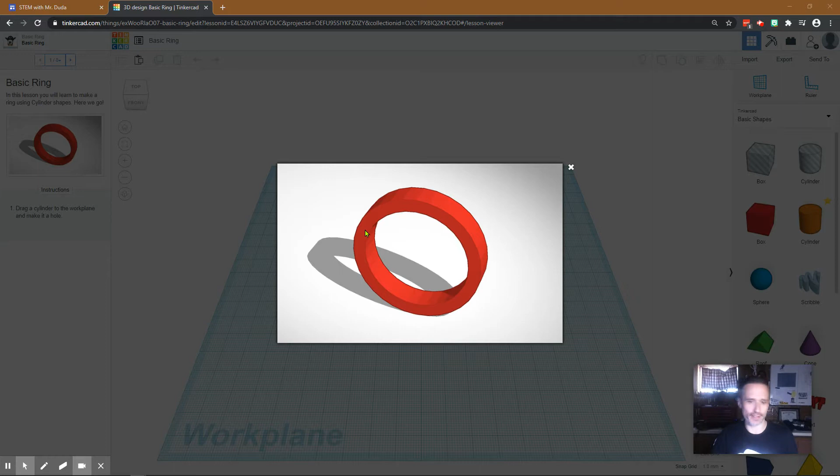So the way we start, we log into TinkerCAD. You can log in with Google. It's just tinkercad.com. You may have a dashboard with a bunch of stuff you've made, or you may not—it really depends on if you've created anything.

You'll click Learn, and make sure this is on 3D. If you haven't done my starter lesson, please check out the videos and follow along. Click on Lessons—I have videos on all of these. We'll need to click See All Lessons. I also have some videos on Die from Scratch, Saw-Shaped Wrench, Simple Heart Ring, and maybe some more by the time you've seen this.

We're going to click on Basic Ring. Restart the project for me, that way we're starting from scratch, making it nice and easy. Then just click on the name here. Start.

Make sure you're using a mouse. A mouse is definitely the best way to do this—it's very hard to use just with a keyboard.

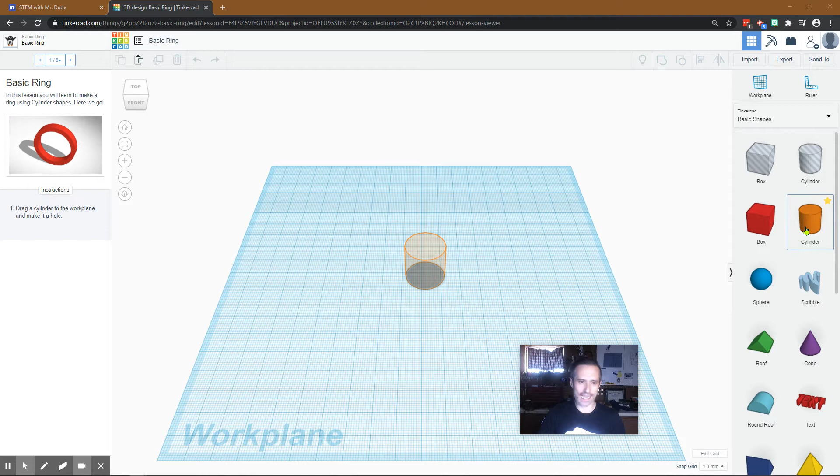So they want us to drag a cylinder to the work plane and make it a hole. Now it's funny, because I'll tell you right now, we could just drag the tube in and make this ring very quickly, but I like that they're teaching you the skills. So let's drag a cylinder in, and they want us to make it a hole. The way we do that is when we let go, we say hole. Now, you could have just dragged the whole cylinder in—it's up to you.

That was favorited. There's a section in here where you can actually choose your favorites, and the shapes are there. Apparently, I really love cylinders.

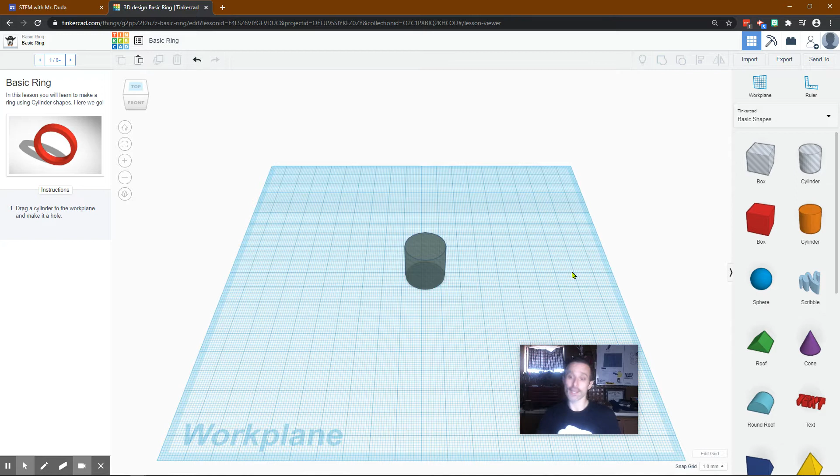So then we click Next. The cylinder should be scaled to fit the finger it is made for. So you can measure your finger, measure the biggest knuckle on that finger so you make sure it fits. We will use 17 millimeters for the diameter in this example, but feel free to adjust the size to your needs. So they're actually telling us to change the size, but they don't explain how.

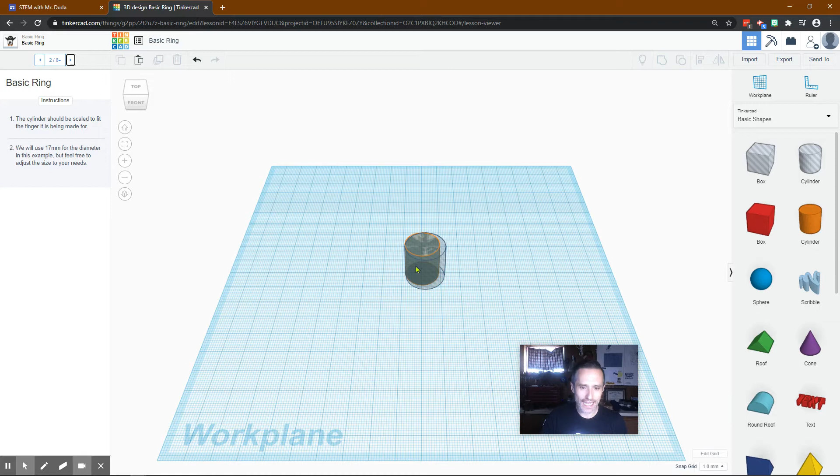The way that we would do that—I think they want us to just scale this down. So the best way, we would click here on the corner, and then we just type 17, press Tab, 17, so we have 17 by 17, press Enter. It should be the right size.

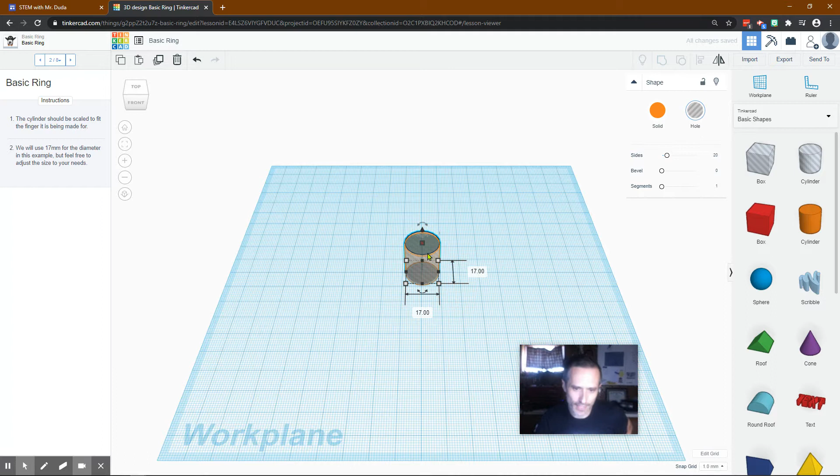Sometimes it doesn't align perfectly. Dragging it farther away and then bringing it back sometimes makes it easier to line up. That looks pretty good to me. I right-click to change my view like that.

Drag a cylinder shape to the work plane—this will make the outside of the ring. So what we just did was create a hole that was 17 millimeters. That would be the size of the hole that you want it to be.

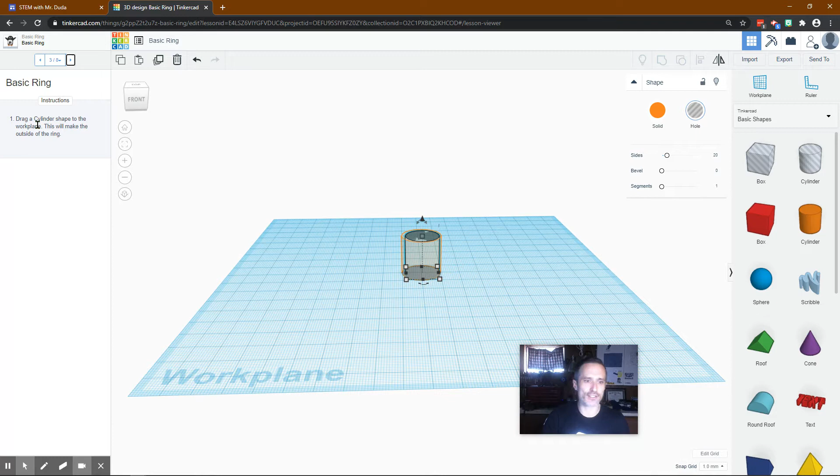Now they want us to draw another cylinder, but this one is a solid, not a hole. We got that out there. Now, obviously, that's not lined up correctly.

They'll address it, hopefully. Scale the new cylinder to be 4 millimeters larger than the cylinder hole. So that's 17 plus 4, which would be 21—we get 17 because the hole was 17 by 17, so we want 21 by 21. We can just type 21, 21. Wonderful.

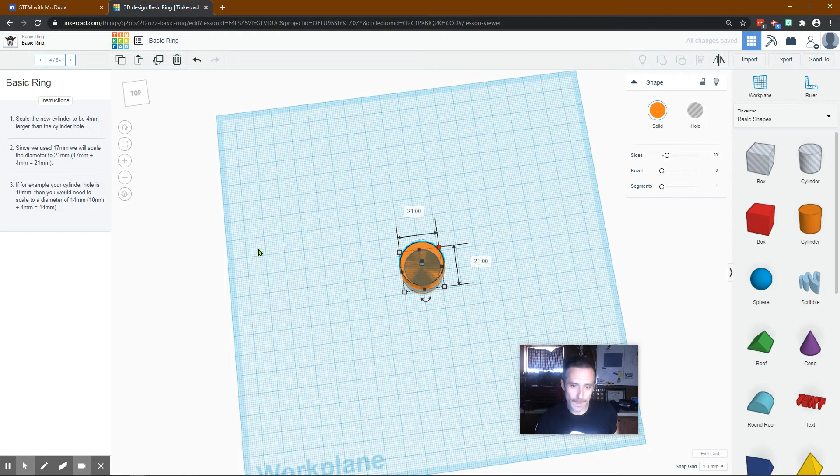So just add 4. If your hole was 10, it would be 14. If it was 12, it would be 16, and all that. Then we need to align it.

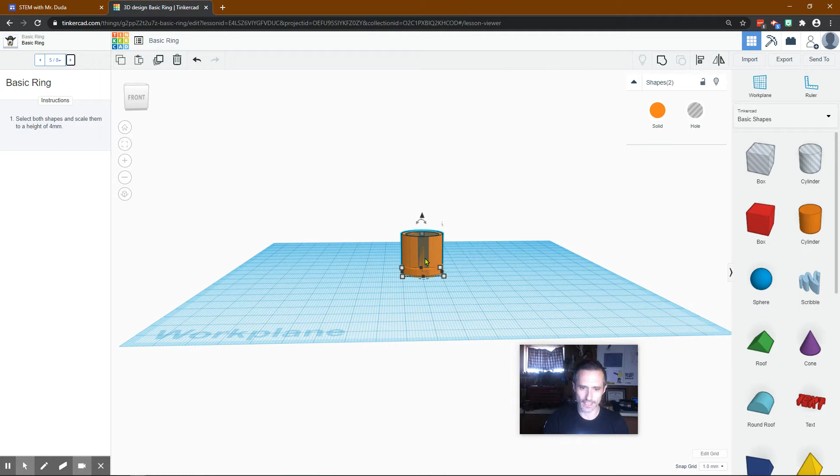Oh, they want us to change the height. So we're going to highlight both of them. That way we just change the height once. We can click this, we could drag down if we want, but I prefer just to type it so I can get it exact. Press Enter.

Keep them both selected and group them together.

Maybe I missed a step, but that doesn't look like a ring to me. It looks like a moon.

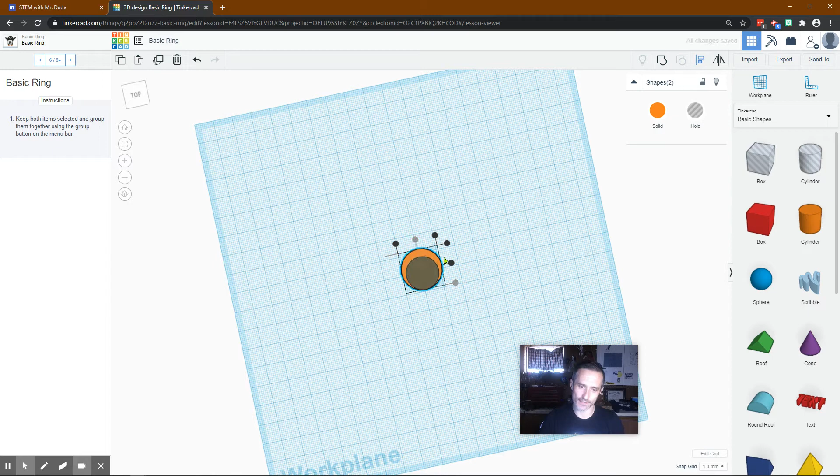Highlight it, you need to align it first. So we're going to align. I click Align, and I want it to center itself this way, and I want it to center itself that way. Now that looks a lot more like a ring. Now I'm going to show you an even easier way to create this in just a minute.

Oh, so they wanted us to combine them. I apologize, we click Group. And now there's a hole.

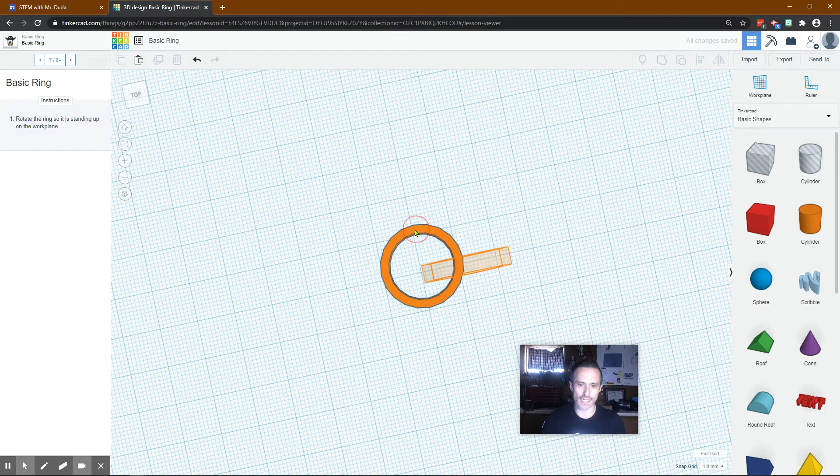Now they want us to rotate it. So you're going to have to change your view. I'm going to rotate my view so I'm seeing it from the side. Right? Now I click this. I look for my rotation.

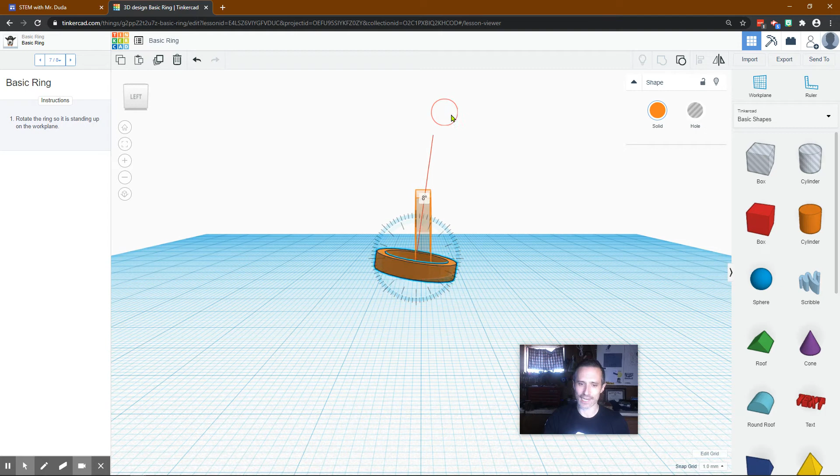See, there is this that moves it up and down, but then there's this semicircle with arrows on it. That's what I want. And I want to drag it to 90 degrees. The farther away I get, the more accurate I can be with that.

Wonderful. And then if you want to make it match, you could bring it up so it's on the work plane, so that's 0. And then you could move it over, right? I'm just using my arrows.

And it looks like they want it moved over that. I'm going to use my arrows. Now when we look, it's perfectly aligned. And if you really wanted it perfect, there you go.

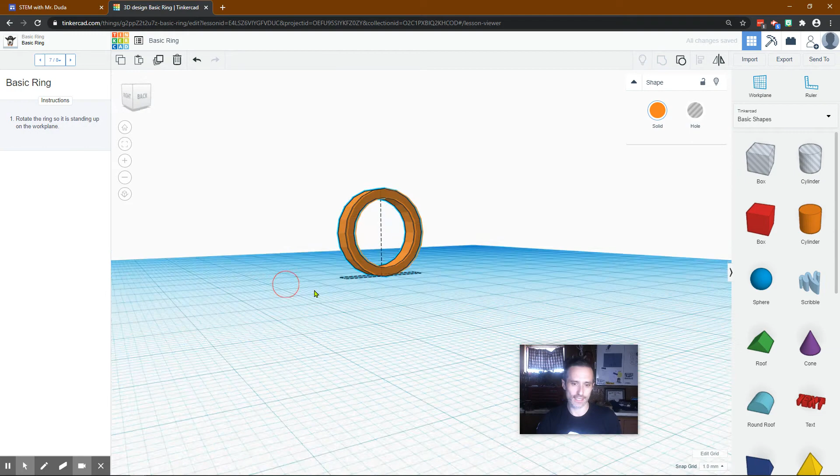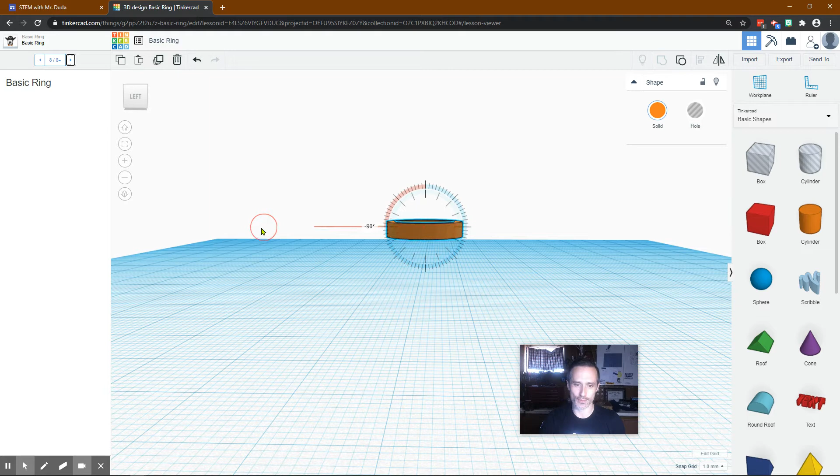Okay? Now they say, hey, wonderful, you did a great job. Congratulations. Let me show you another way we could have done this. So if I'm looking at this, I'm going to rotate it back down onto the table, or onto the plane, onto the surface. Give me just a moment. 90 degrees. Bring it down so it says 0 on that right-hand number.

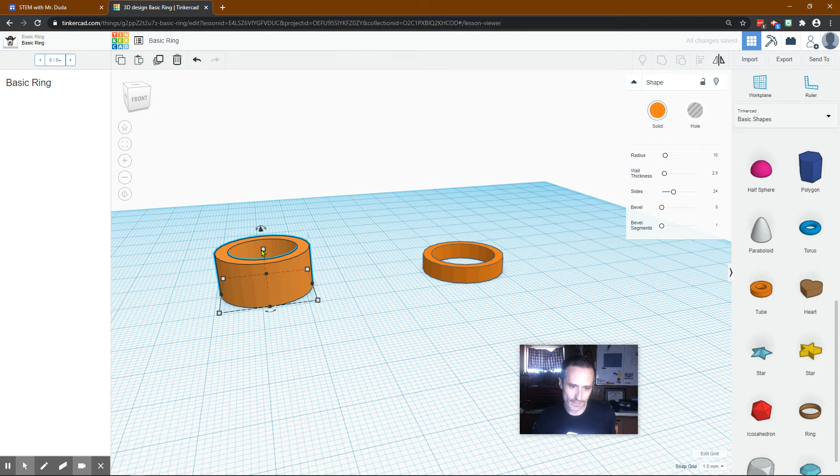All right, so if I look, my outside dimensions are 21 by 21. I could have dragged this tube in. I could say, okay, I want it 21 by 21. It was a height of 4. So I click that, I say 4, press enter.

That's looking pretty close. If we remember, this was 4 millimeters thick, right? So if we go up here, we do have a wall thickness that we can choose. If you can get it to be 4, that's the hard thing. Dragging it gets a little old, so you can just click on that number and say 4, press enter.

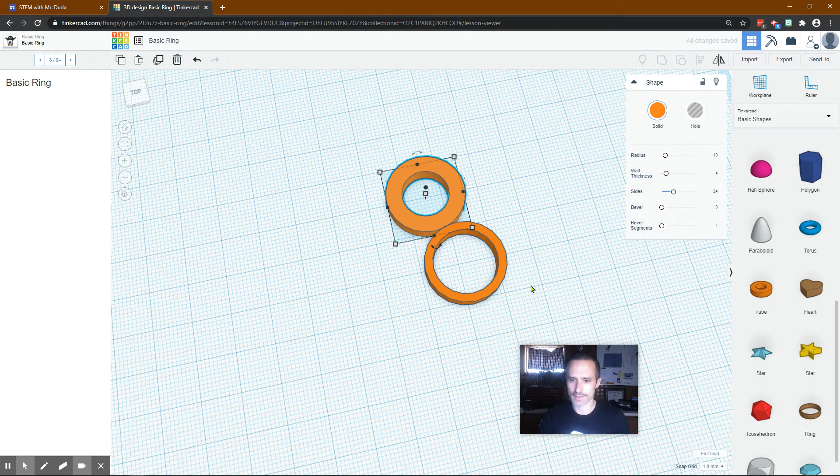Interesting, so now I'm seeing that perhaps that's not correct. Maybe you know why, think about it. We added 4, we didn't add 8. So we have a wall thickness of 2, and I just made a wall thickness of 4. So let's fix that.

There we go. And now we've got a ring that should be exactly the same size, and that was a lot faster.

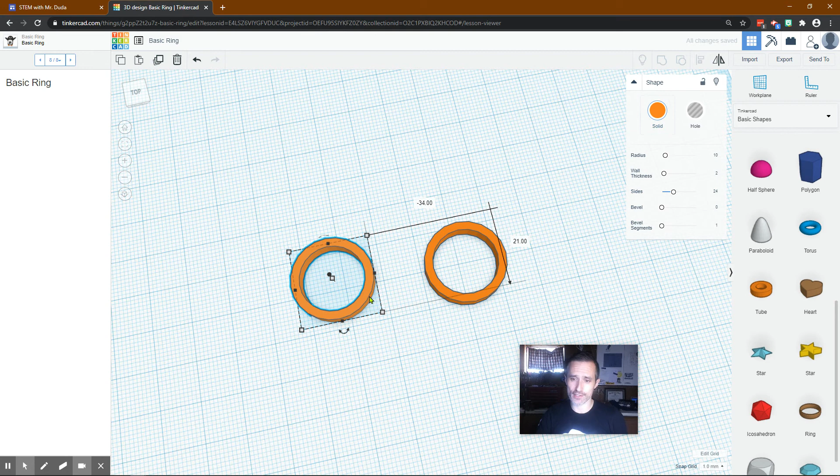Okay, you can change the colors all you want. If you want to print one of these rings, okay, don't keep the ring... okay, don't have both on there.

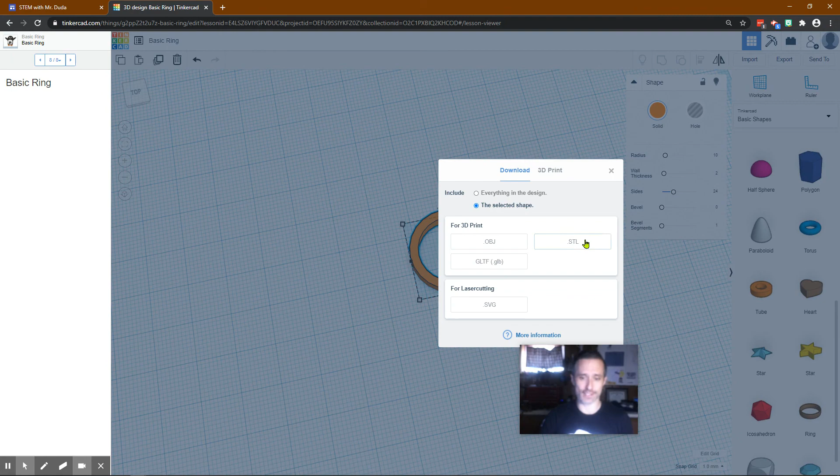If you want to print it, you can just go to export and you can download it as an STL or an OBJ. If you don't have a 3D printer, you could go to 3D print, you could send it to someone, or maybe your local library does it. You could download it as an STL and then send it to them, and they'll print it. And normally it's pretty cheap.